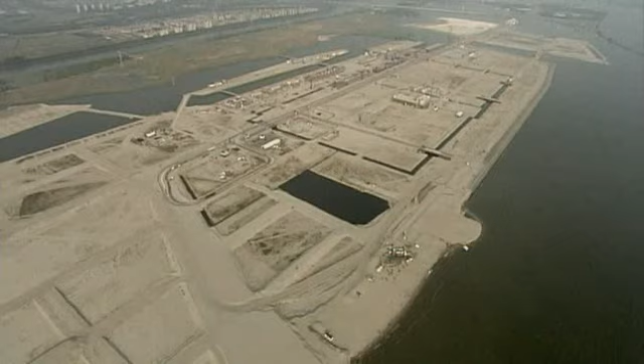Amsterdam, the capital and largest city in the Netherlands with 750,000 inhabitants. Every day, around 1 million people travel by bus, tram and metro. But the current above-ground bus and tram network can scarcely handle all these passengers. While at the same time, the number of passengers is constantly rising as the city expands in areas such as IJburg, Amsterdam North and the South Side.

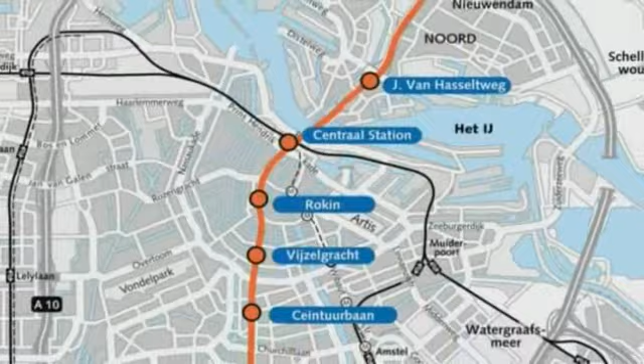Travelling from Amsterdam North via the busy city centre to the south can only be done by bus or tram. Amsterdam does boast 3 metro lines, but they mostly avoid the centre. The centre is becoming busier, so the city needs a new metro line. A metro line from north to south via the centre. After years of planning, work officially started in 2003.

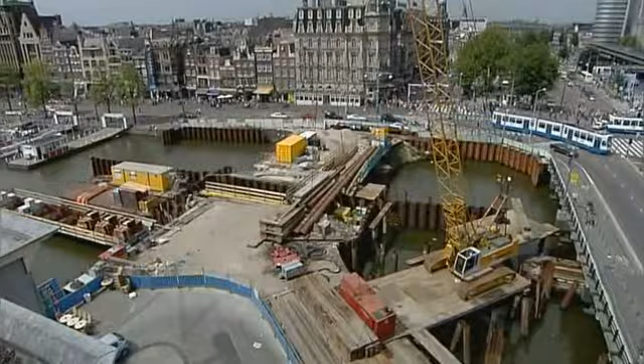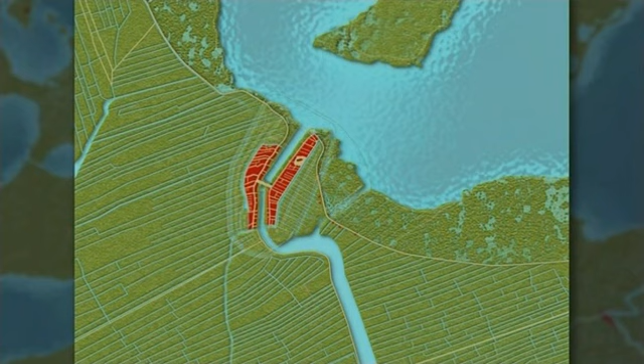Amsterdam was founded on the banks of the rivers IJ and Amstel around the year 1200. After a dam had been constructed in the Amstel, the city expanded rapidly. Thanks to its excellent location on the river IJ, in the 17th century Amsterdam became a rich trading city. Many houses, warehouses, towers and churches were built in the tightly packed centre. So over the centuries, Amsterdam became an important economic centre, the beating heart of the region.

But this also meant the city became fuller and more crowded. The tram and the car made the streets even busier. Now, at the beginning of the 21st century, the city streets, the arteries of the centre, are slowly becoming choked. Good accessibility is indispensable for Amsterdam. Economic growth depends on it. The Amsterdam North District is developing rapidly, and the Southern District, the South Side, is a prime location for businesses. The North-South line will establish the much-needed fast North-South connection via the city centre to the South Side.

In the 1970s, the first metro line, the East Line, was built. This meant that many houses had to be demolished so that metro tunnels could be put in place from an open excavation site at street level. There were many objections from local people. Consequently, Amsterdam temporarily shelved the plans for constructing a metro line under the city centre.

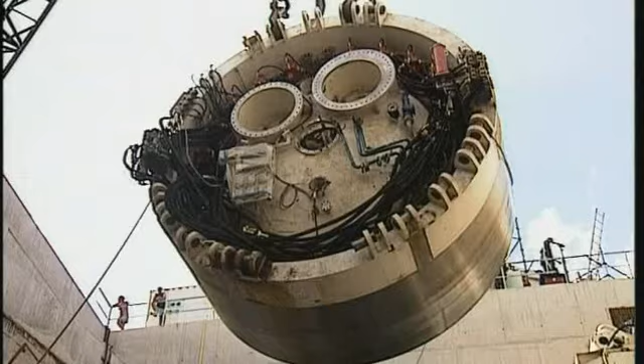However, new techniques were later developed which made the construction of the North-South line possible, namely tunnel boring machines, which could bore through the weak Dutch soil. A perfect technology for constructing the section of the North-South line which runs under the old city centre. Boring a tunnel under the city meant no houses had to be demolished, with considerably less inconvenience. In October 2002, after many meetings about the costs and risks, the City Council gave final approval for the construction of the North-South line.

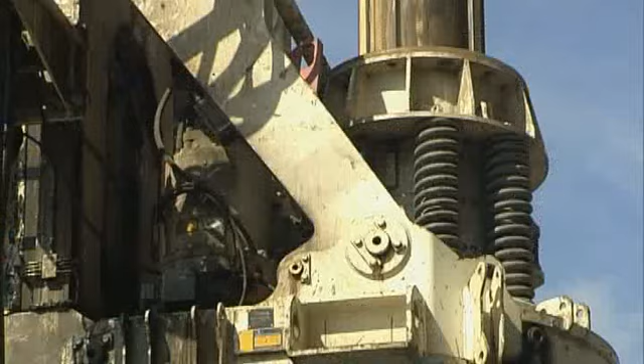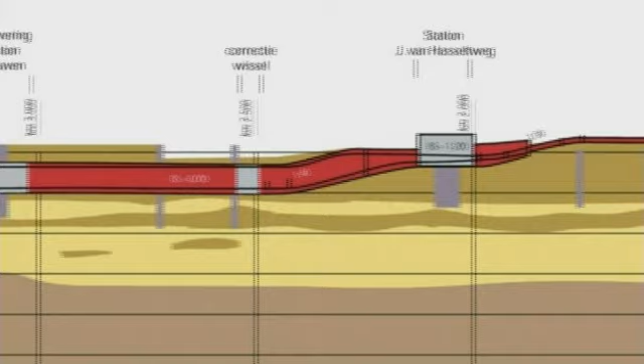The construction of the North-South line through the heart of Amsterdam is a large, complicated project. A unique project, as 2 tunnels have to be cut under the historic city centre. Various techniques will be applied. The North-South line begins or ends above ground in Amsterdam North, slowly goes underground and continues under the River IJ through an immersed tunnel. This involves commonly used techniques.

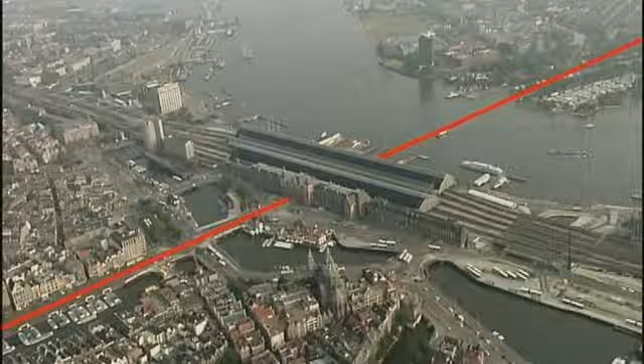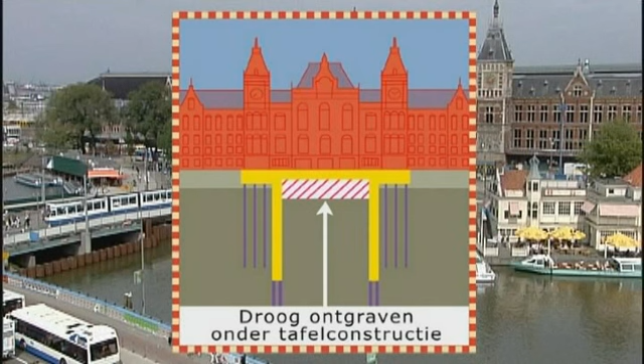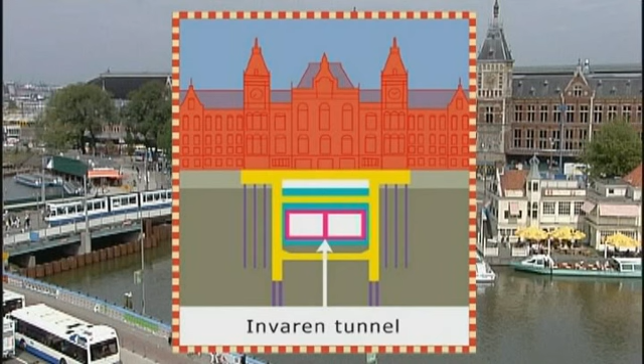The line then continues directly under the central station. This is a far-reaching operation which requires a special approach. The space for the metro station under the station's central tunnel is excavated by the walls roof method. Only the soil is removed, the groundwater remains in place. A channel is dug to the River IJ, enabling the tunnel segments to be transported and sunk in place under the station. In the meantime, the central station remains accessible for travellers. Using the same walls roof method, the southern section of the metro station is built under the square in front of the station.

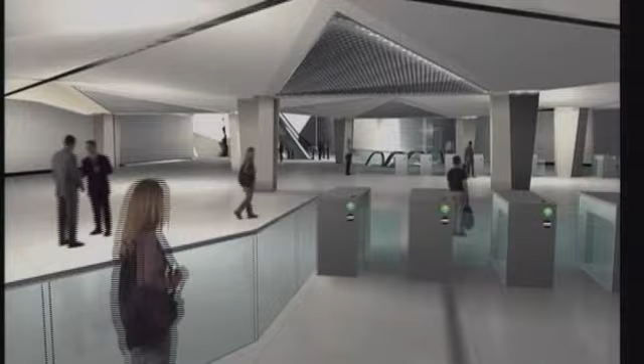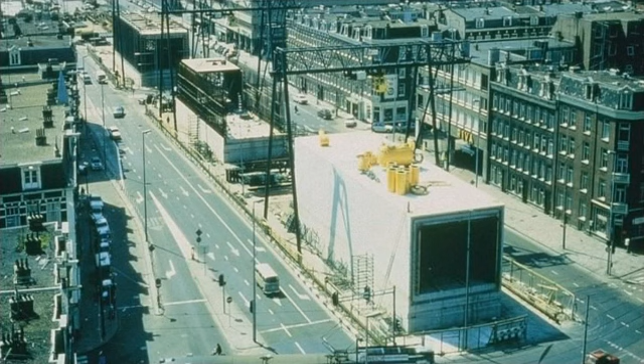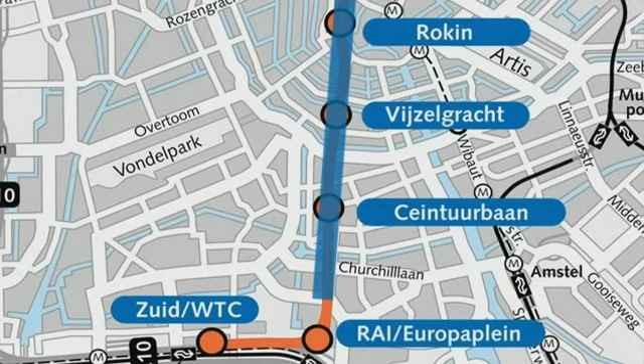The section of line between this area and the Damrak makes use of the caisson technique, the same method that was used for the construction of the East Line. This involves lowering the tunnel segments from the street level. Next, two tunnels are bored under the centre from the north side of the Damrak. This technique is also used to continue the North-South line to the Scheldeplein. The line continues underground in an arc around the RAI to the A10 ring road, where it surfaces and connects with the South WTC station. The total length of the line is 9.5 kilometers, with 8 stations en route.

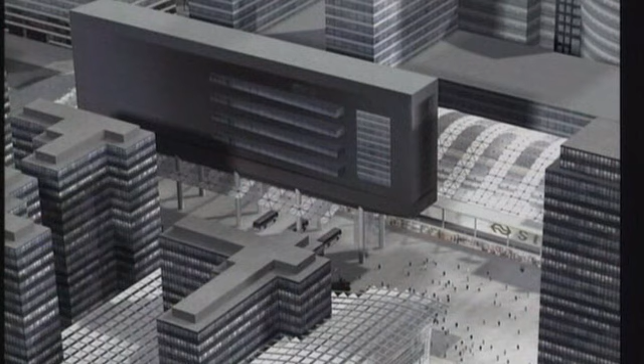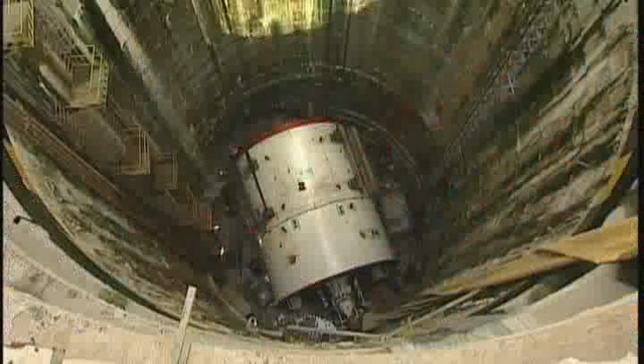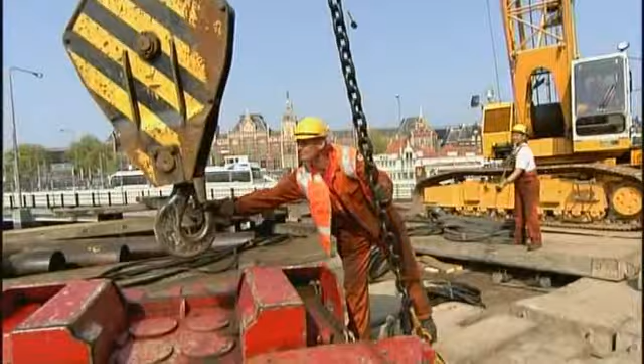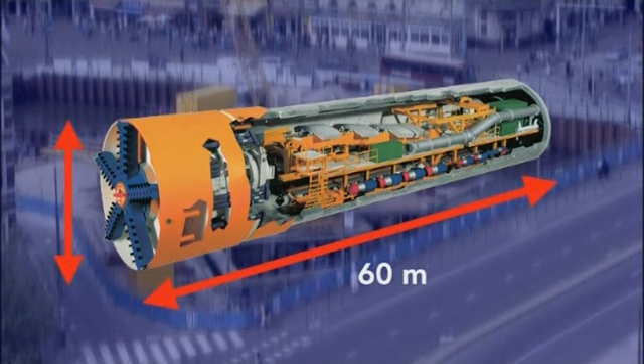Two specially constructed tunnel boring machines will bore the two 7-meter diameter metro tunnels over a total length of around 4 kilometers. The tunnel boring machines are assembled in a 20-meter deep launching shaft on the wet Damrak soil, after which they will each drill a tunnel. The second tunnel boring machine will start boring 3 months after the first. A tunnel boring machine is 60 meters long, almost 4 times as long as a city bus, and is a complete factory in itself. The cutting wheel at the front slowly cuts the sand and clay, which when mixed with a special boring mud is flushed away.

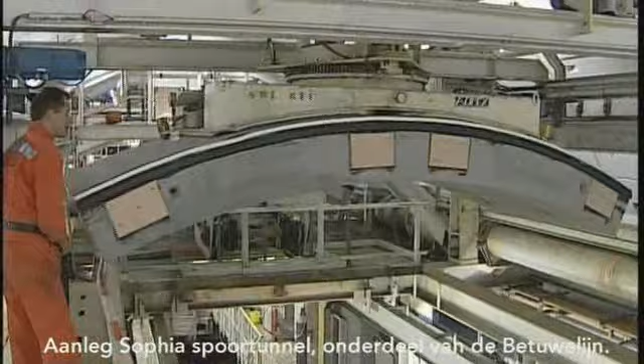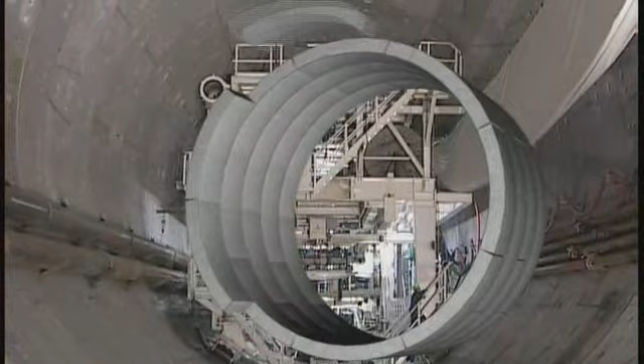When sufficient space has been cut away, a special machine places the concrete tunnel segments at the precise spot. 7 tunnel segments are needed each time to completely seal off the tunnel walls. The new tunnel segments are firmly pressed into place and the tunnel has become a bit longer. The machine can embed around 13 meters of tunnel every day. Temporary rails for the transportation by train of personnel and material are laid in each new tunnel segment.